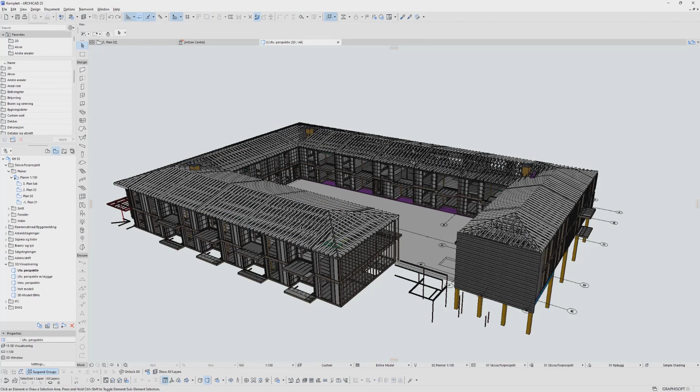But since this was without cladding, we found out that we could test this since we have some automation regarding the saw cuts for every window. Since we delivered this one without the cladding, we found this suitable to test both hot linking and ArchiCAD teamwork. So this is a colleague of mine doing all the walls.

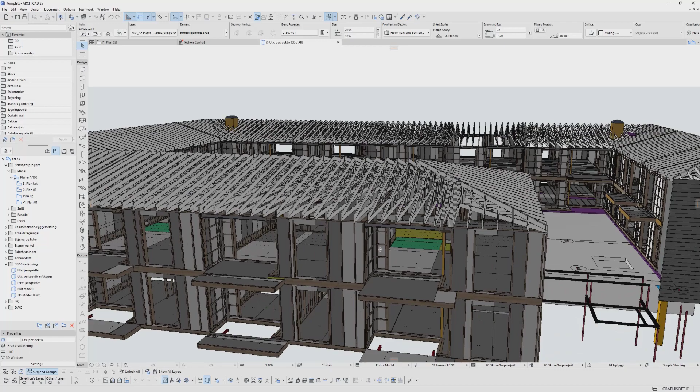Trusses are of course done in Pamir, but I did also most of the flooring elements with ArchiFrame based off the teamwork server.

So Petteri has asked me to show a little bit on how we work at Støren Treindustri, and I will do that. I have found some random plan drawing on the internet and I have done some architectural modeling of this.

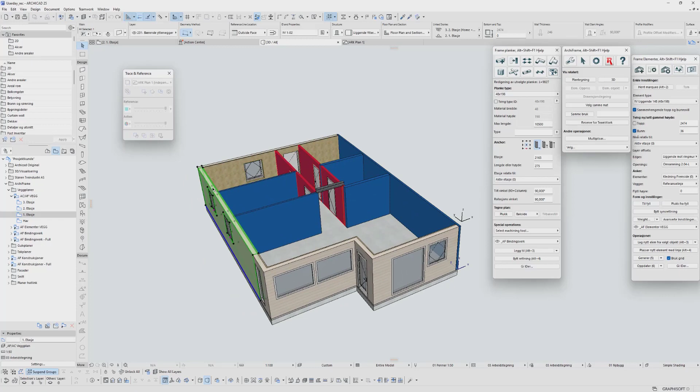We have external walls, we have load-bearing walls, and the red walls are non-load-bearing. These are supposed to be the sound and fireproofing between the apartments.

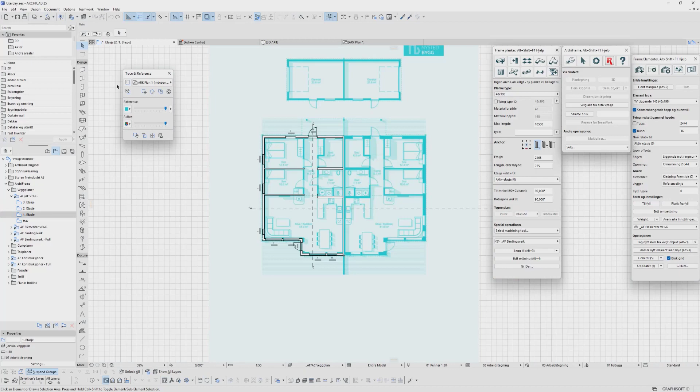So when doing ArchiFrame, I will just turn off this, and we have some preset settings that I've already made, where you can see I have edges, I have openings, I have also lifted it 36 millimeters. I change this to core and reference line, and then I just start adding elements.

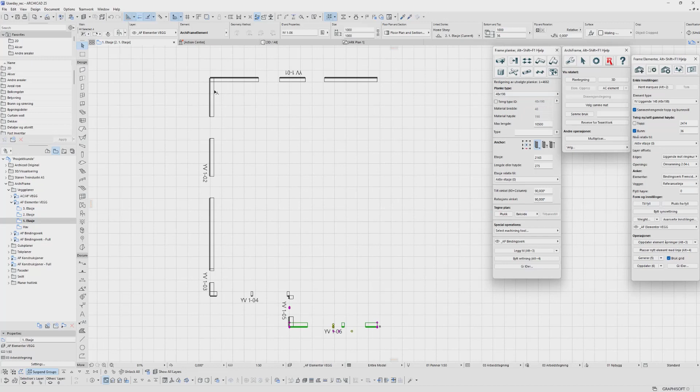When these are done, I can go to these settings, which shows all the elements. Before even making or generating the elements, we can adjust the corners.

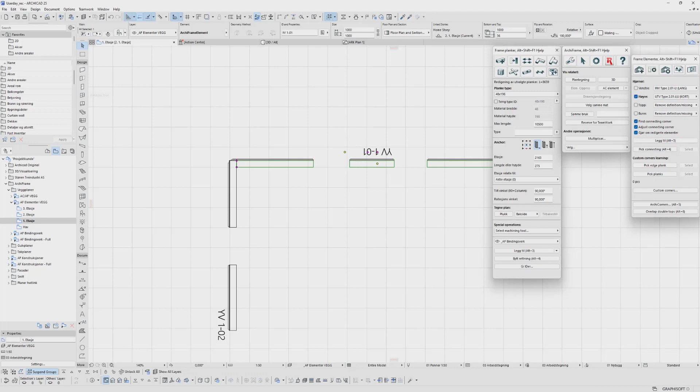This is a nice feature I really like about ArchiFrame, where you can code your own corners. Since I have pre-coded all the corners for us, I will just add this one. As you can see, all the elements are adjusted accordingly.

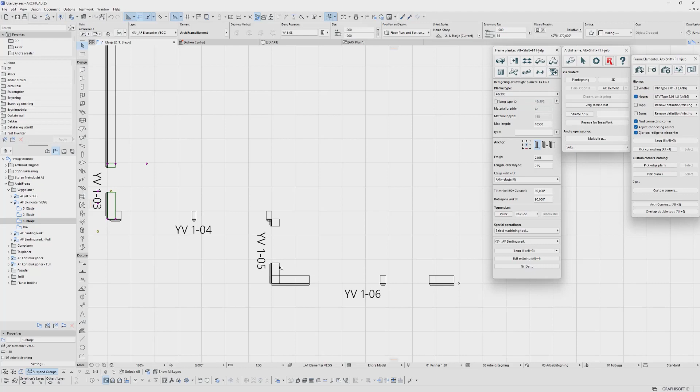Now that every corner is set, we have an internal corner. You can also add this. Or maybe this should be short. Now you can just select everything and generate.

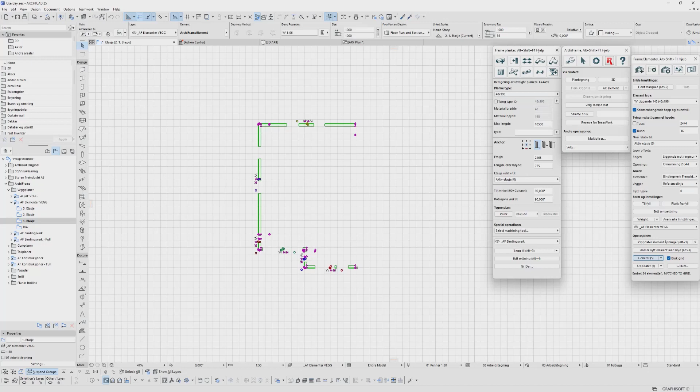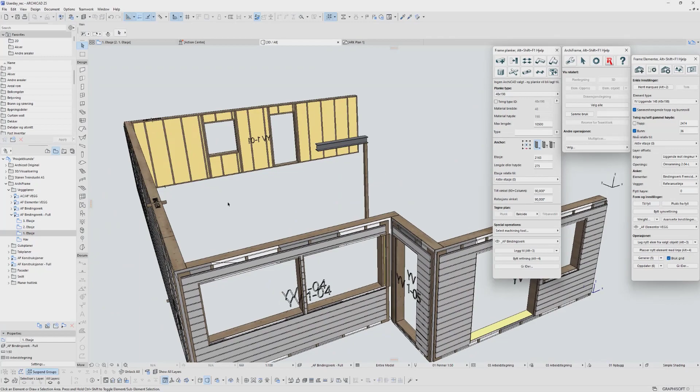And the machine will think a little bit about this. So now we have generated all the elements. I could go and change a little element settings, and now we have our ArchiFrame elements generated with the connecting corners like the one I have presetted.

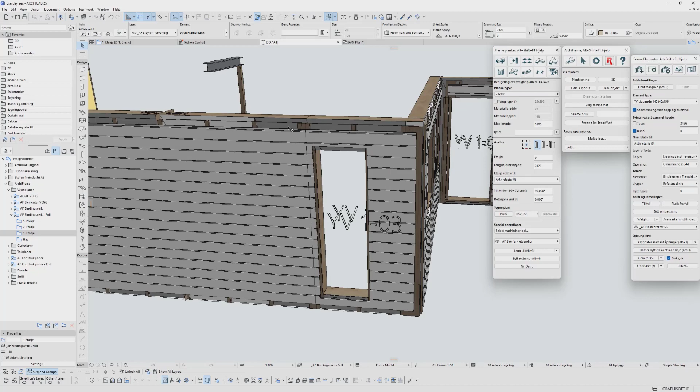One of the nice features with ArchiFrame is when the automation or the preset corners doesn't work. This wall is divided because this is the maximum length that we can produce. You could, of course, just make a standard corner for this, but since the offsets for windows are different, at least only the core and maybe the plate or the airstrip layer should be cut. But with ArchiFrame you can easily just adjust those pieces that doesn't function.

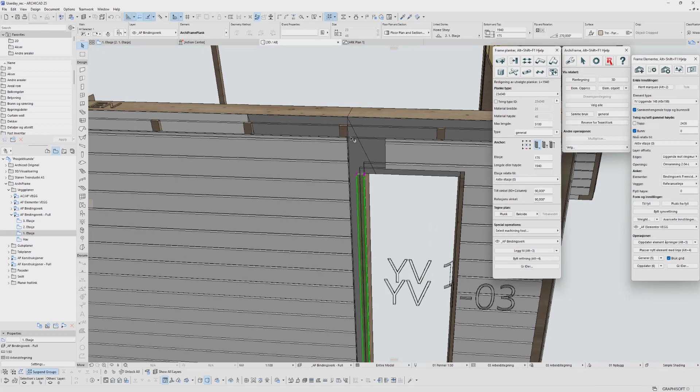Like we could remove all the unwanted pieces. We could adjust this one. I want this one to be a 98.

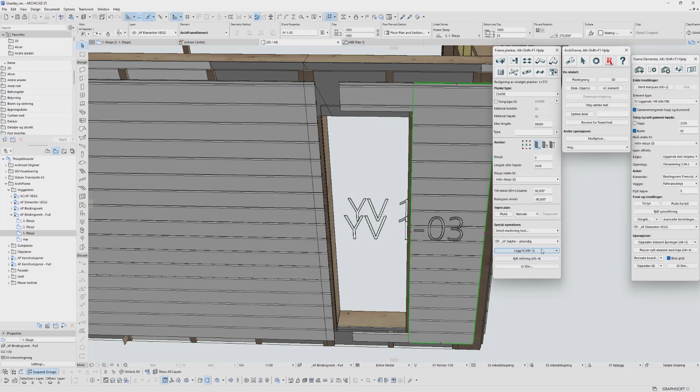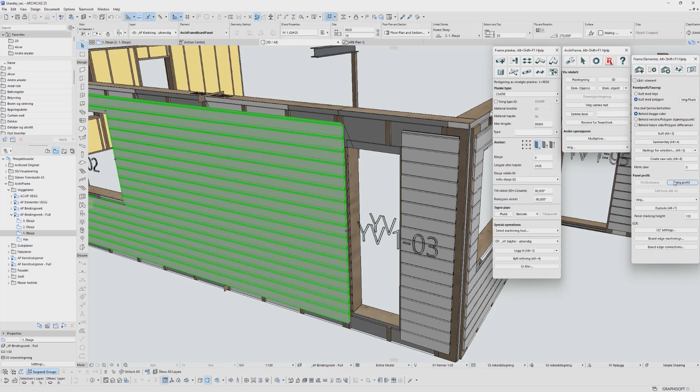This is almost what we produce. Of course, this should be exploded. Probably this piece will go there, and about something like this will probably be our production. So the pieces around this window must be done at the construction site, but then at least we will have all this cladding produced in the factory.

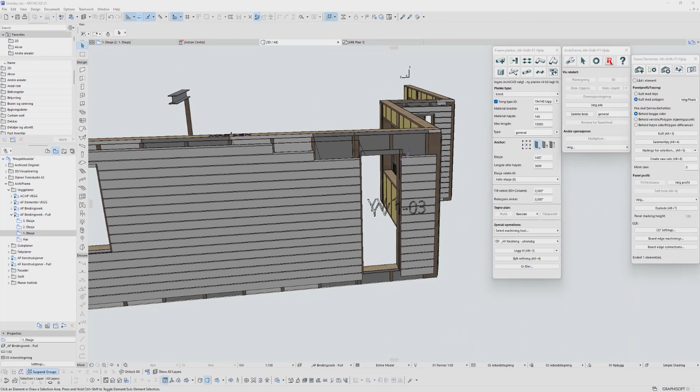Of course, you have load-bearing walls, and sometimes the automation doesn't quite get you what you want. We can add load bearing for this one. For example, these pieces we at Støren at least would like to connect.

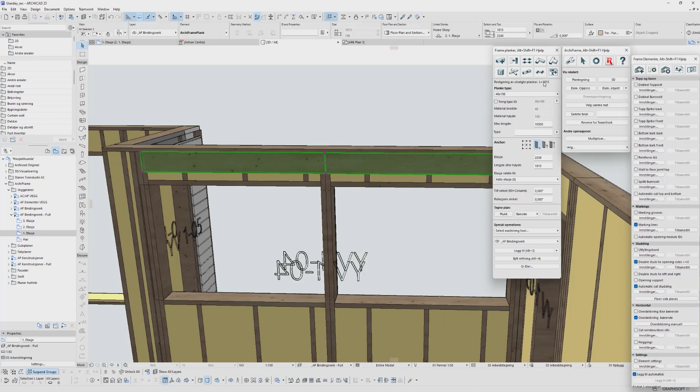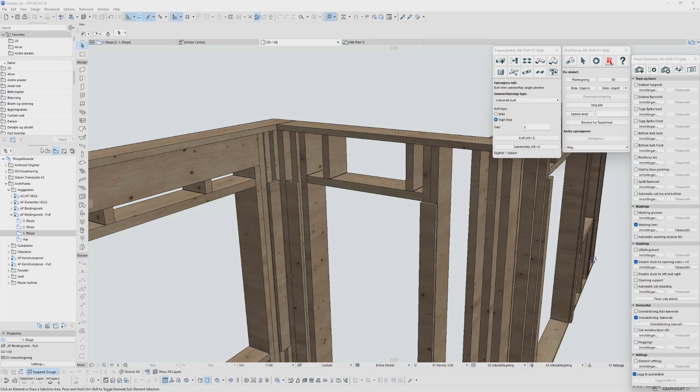There are several ArchiFrame functions that are easily accessed by the menus, or you can even script most of them. So for one instance, one of our tailored settings that Petteri has made for us is the sawcut script.

We have a sawcut script that defines sawcuts based on the openings. We can actually add sawcuts, and we are able to produce this in our Weinmann.

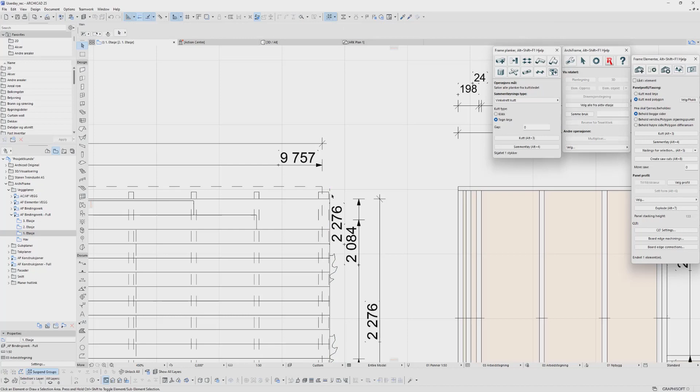Of course, for actually this wall, it would be best if this one is adjusted and those two pieces are manually made in the factory so they can be added on the construction site.

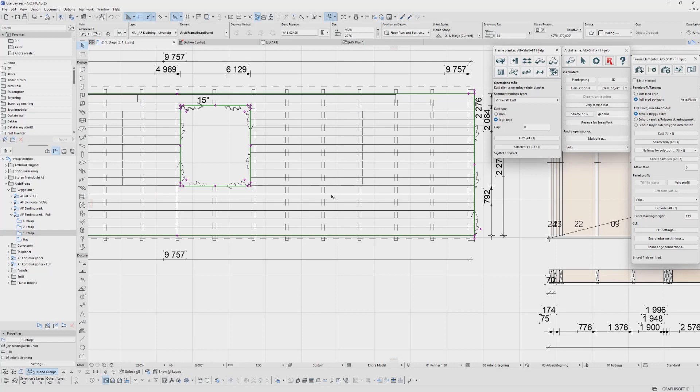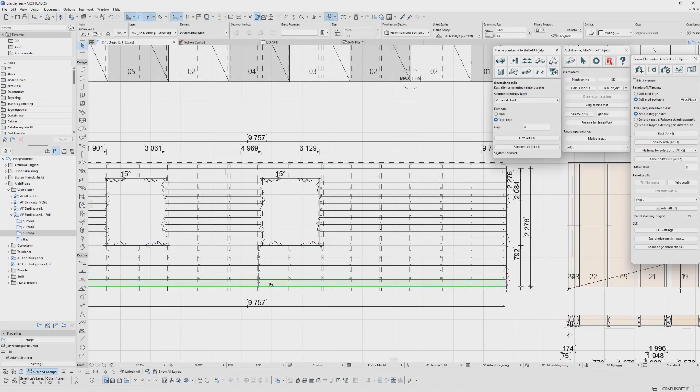Another nice tailoring that we have had Petteri fix for us is the nailing script, with the possibility to add nailing with scripts. This is some tailoring that has been done. We have for horizontal cladding - we don't want our first one to have nails, nor the two top of the windows, since those are manually done, or we need this for our production.

ArchiFrame gives us the possibility to change the side pieces for windows. We use another dimension than the standard ones for the air strips. Overall, everything else stays the same.

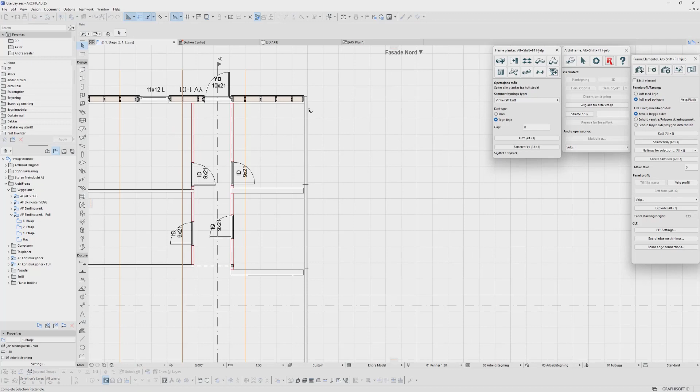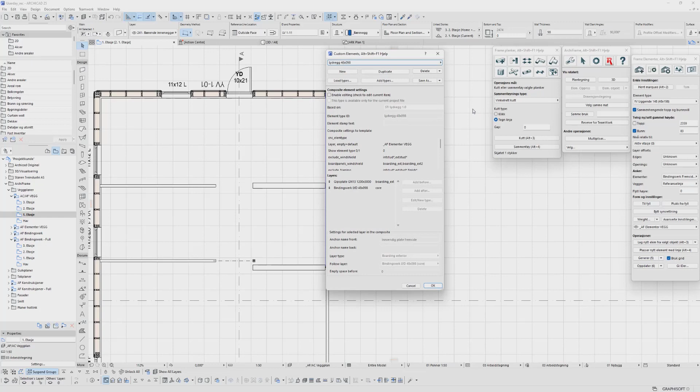Another nice feature of ArchiFrame is that you can take one standard, or at least one working script, and adjust it a little bit. We've done this with the sound walls - you could add a sound or apartment wall for these two.

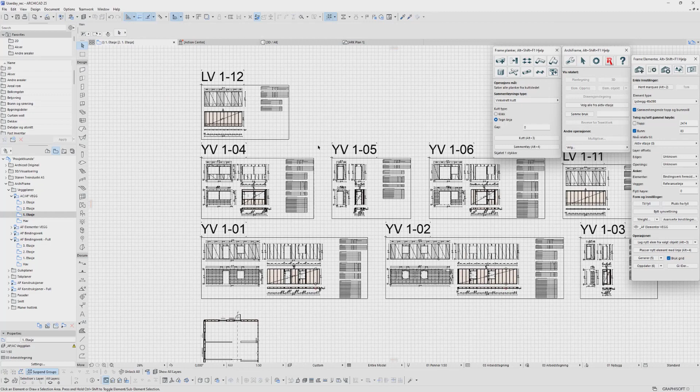We have adjusted the top and bottom balk to suit our needs. We use a 23 by 98 instead of a big balk. So let's show this in 3D.

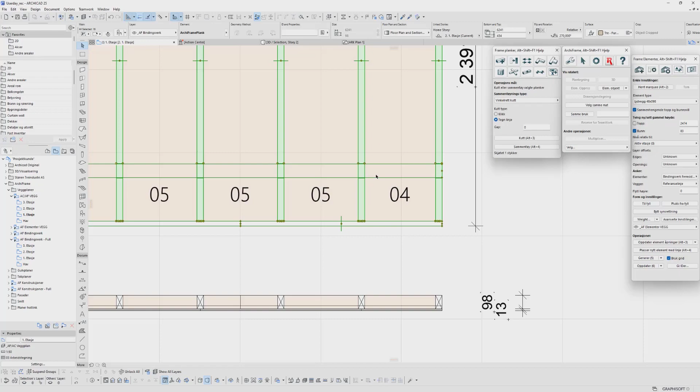When we deliver these types of walls, we need this top and bottom for nailings on the construction site. So, well, I should probably do this and regenerate it.

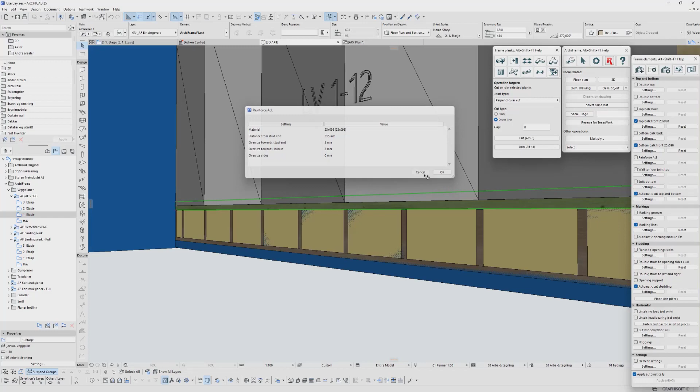Now it's better. As you can see, this script is made of... I could actually just change this to English, probably most people would understand. It's bottom balk. By changing these settings, we could use it for another purpose than it's mainly supposed to do. We'll also add the edges settings for this one and recreate the boarding.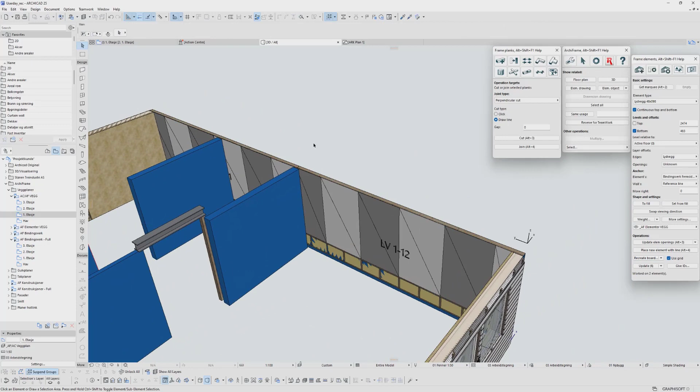Another nice feature of ArchiFrame is that you can now select multiple walls. It's mainly important for walls like this. So if we just hide all the other layers, you can now select everything.

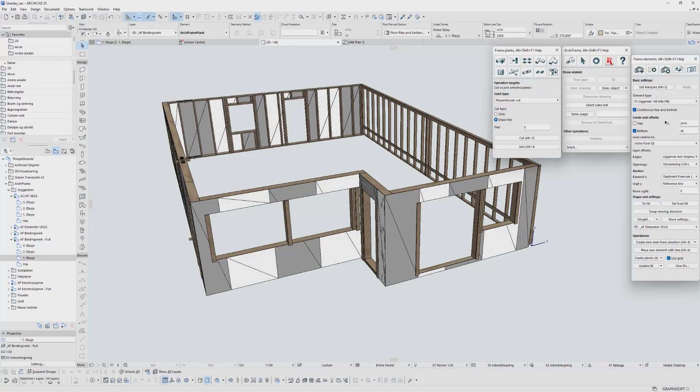You can add nailings, and the nailing will only be done to connecting elements. So this plate won't nail the beam in this wall. This is a really good feature, so you can add nailing to the whole project in one go.

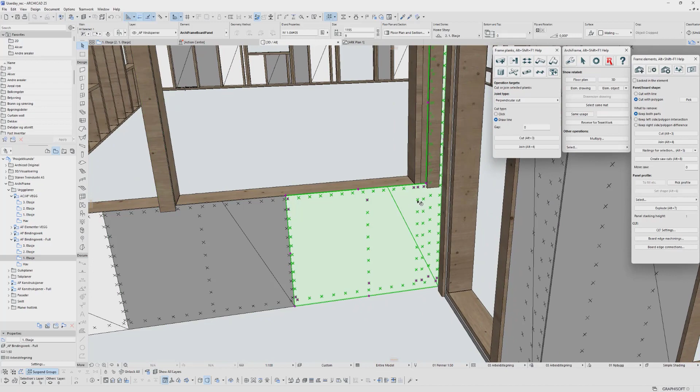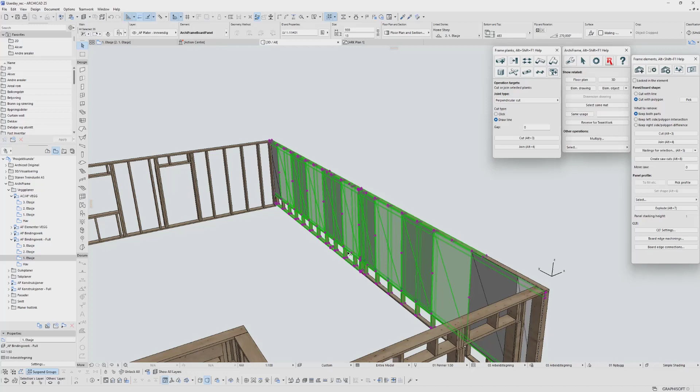Also, if the nailings are too much, you can easily just go through the model, every wall, and decide that you want to remove some of the nailings. And of course, you will need to add nailing to different types of board, or if you have different types of nailings like we do.

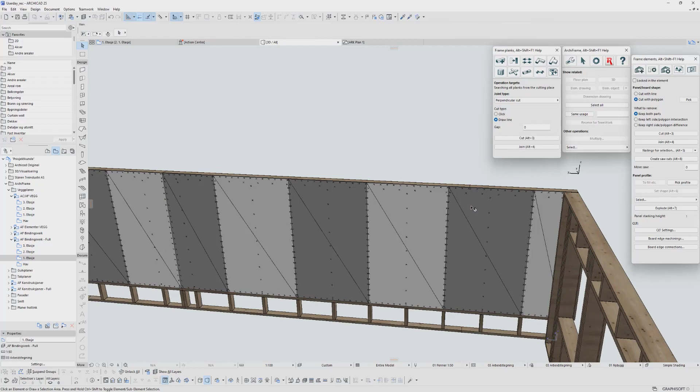So we should also be doing some interior walls.

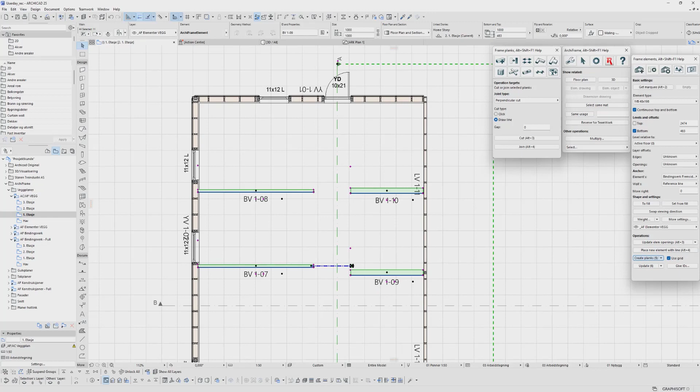With ArchiFrame, you can easily double up studs. You can work in 3D. Here we have some troubles.

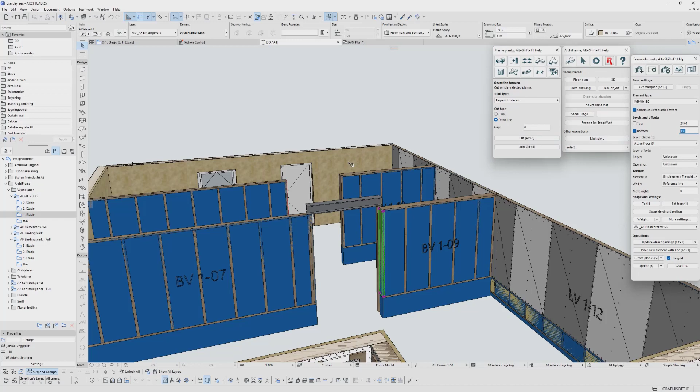This has gotten the offsets from the plates. It's an easy fix - you can of course just remove the offset and recreate the element. If you go to the element object, you can adjust it down. You can set this to 0.

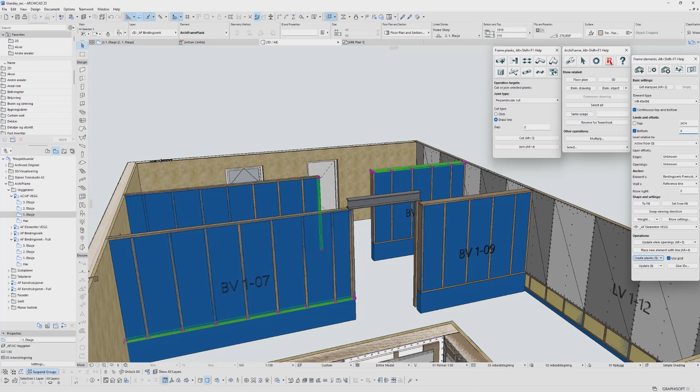If you do this on all these elements, then recreate it, they will be fixed. So also in 3D, it's easy to just double or triple a stud if needed.

And of course, we hide all the layers. We can now go and explode all the cladding pieces. This done - could also be adding, sorry for the Norwegian here.

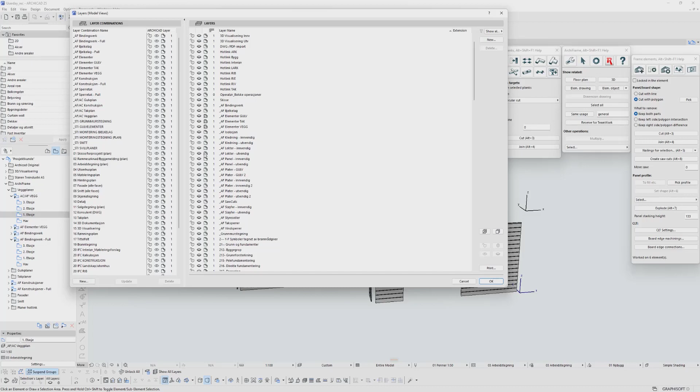It's easier. Then we can add nailings. Here it's also possible to add nailings to several elements at the same time - you don't need to do this one by one.

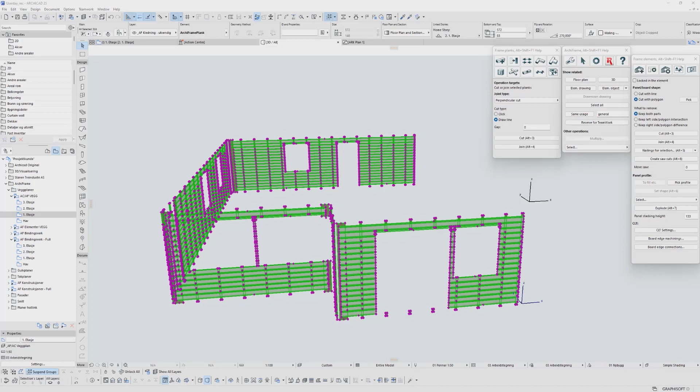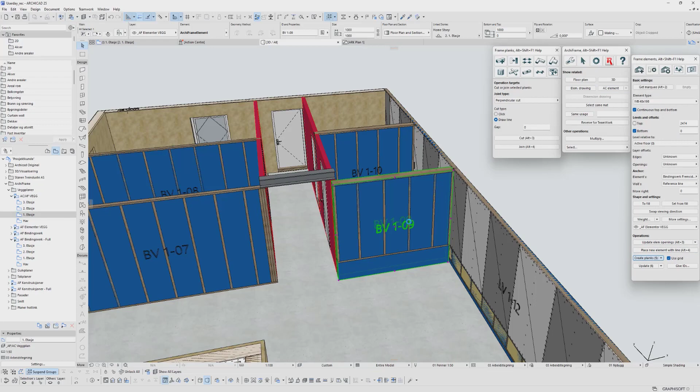Now all the cladding nailings are done. We can go and - this one wasn't correct. Recreate this one.

So if I just show you all the construction now, we have insulation, we have cladded, we have nailings for boarding, we have this one adjusted. Of course, there will be some manual adjustment needed, but if you say this is finished, we can go ahead.

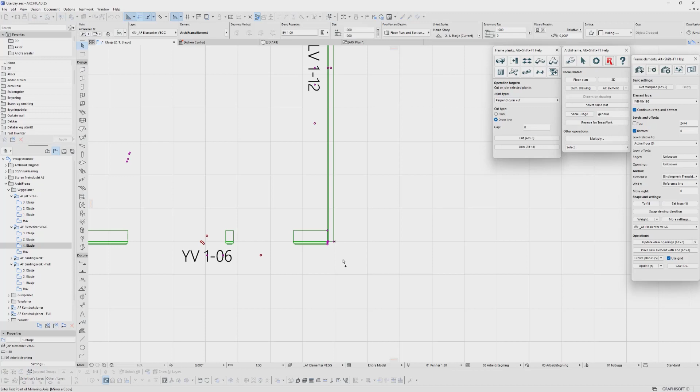And duplicate this one. So by just selecting all the elements, it's possible to use standard ArchiCAD mirror and copy.

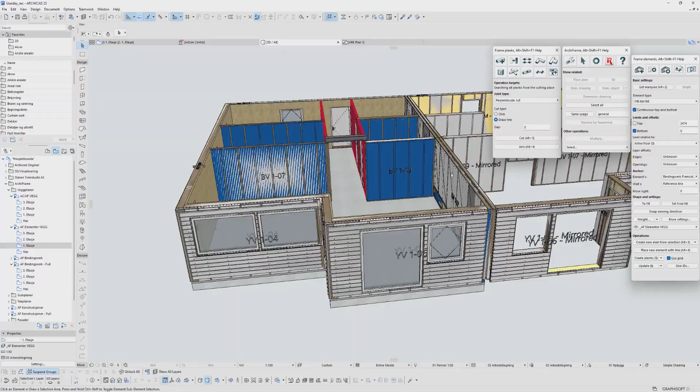So after mirroring and copying, you will then have a mirrored copy of the same, even with nailings and everything. So if you are mass producing, this is a very nice feature that could be used.

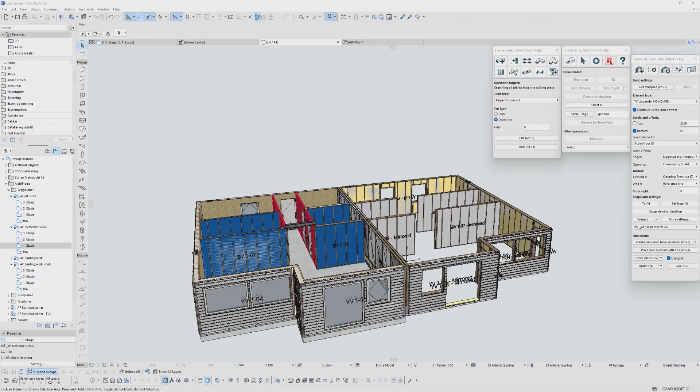So regarding the SawCut script and the 2D, of course this one doesn't have an elemental drawing yet, since it's only the 3D pieces. So you have to update it, and then it will get an elemental drawing. And it won't be linked, so if you mirror a copy, you can also mirror a copy of the walls

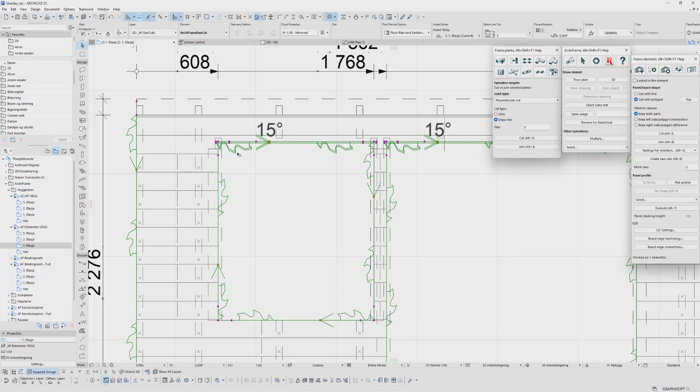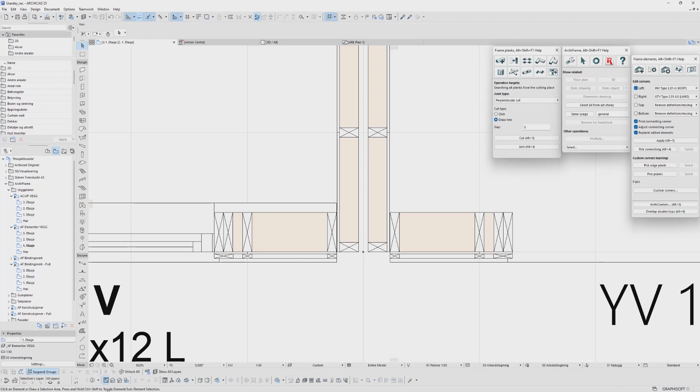So for corners that are close by, it's a nice trick to remember that you can use pick connecting to ensure that you have the right connecting corner when you are applying one. So our corners for this type are made up of the external and one internal.

When walls are so close together, sometimes the software finds the wrong one and the wall gets all crazy. But by picking the connecting one, you will be able to force ArchiFrame to use this one.

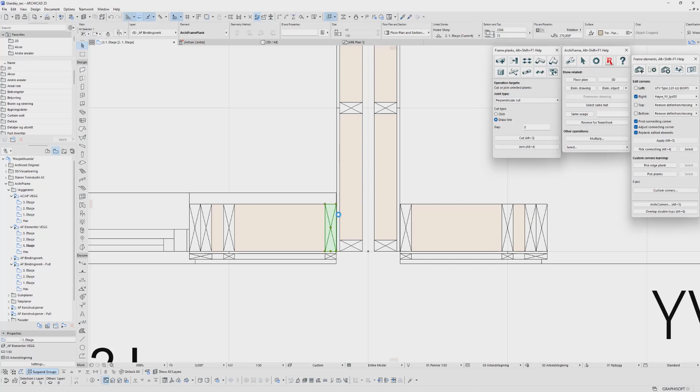If you follow the tutorial on YouTube, you can make the two external walls connect to each other, then have the internal walls connect to each side, and maybe do all these four in one go. I haven't tested that yet, but I have a theory. At least you can pick the right connecting one if you know which one it is and apply this.

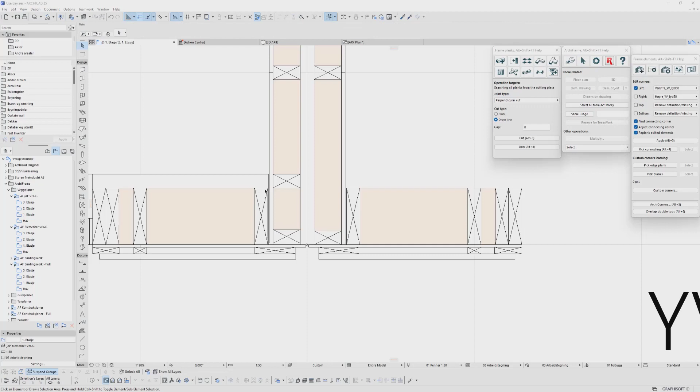See, this one doesn't have the right 48 by 98 stud, but it has the correct air strips. By using corners, you can also add different types of planks instead of just dragging the element. You'll be able to have different sizes or even add several pieces. So yeah, this is our way to model ArchiFrame walls.

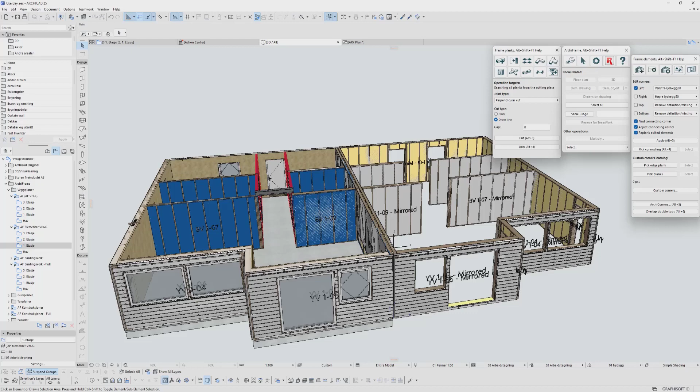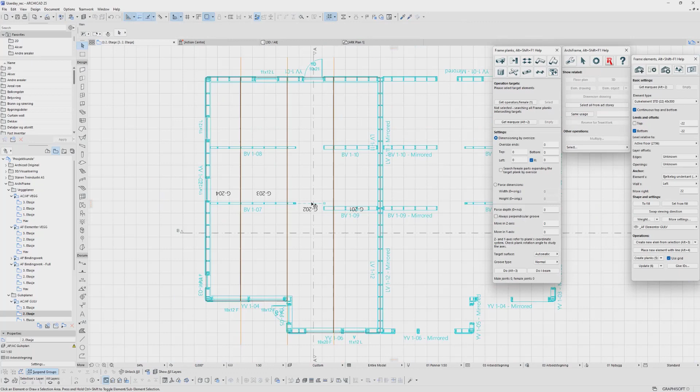So let's make some floors. I believe we have to have this on, and I'll be creating those in the negative Y direction. We can create all of them first, just to see everything before we have to make adjustments.

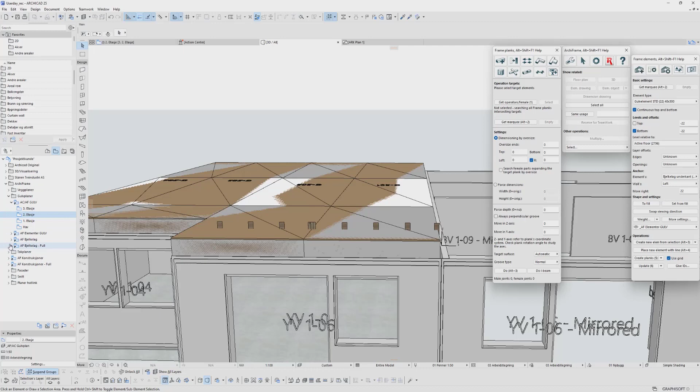Probably go off the wall and do some of these, which are of course more than our maximum length for this type, and it would not be possible to produce, but for this it's okay. It's probably possible to script or adjust with some Lua settings, but for now we will just delete the unwanted pieces.

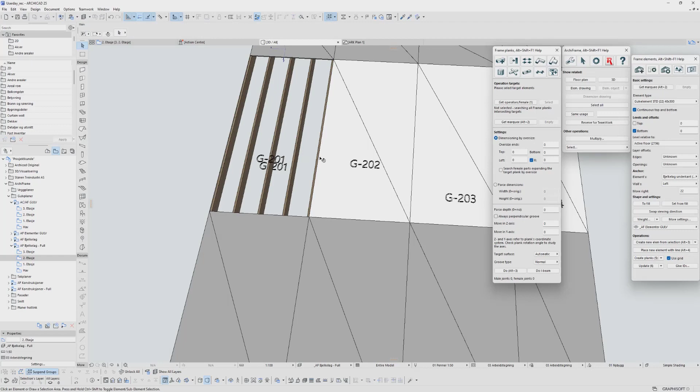If you can see the numbering, it starts with 1, and we have it so this piece has a full length, but this element won't have a beam, since the plate on the construction site is in the same place.

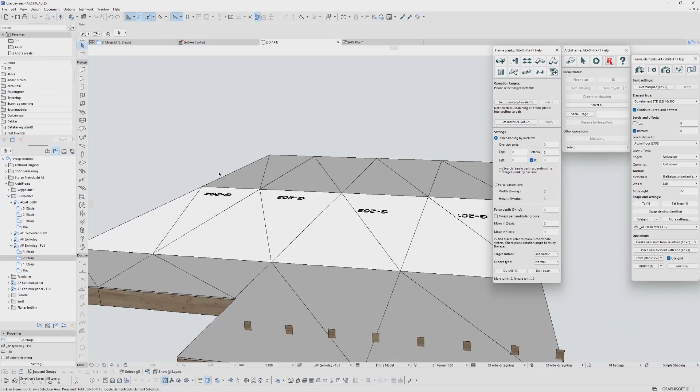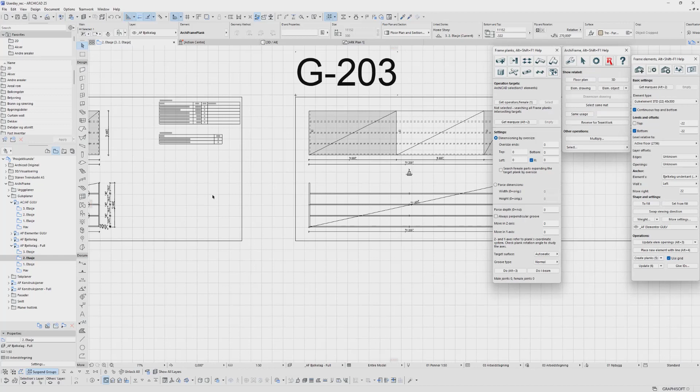I also did this upside down, because if we export it to the WUP file, we would want this one, since this is the 0,0 on XY in the WUP. So we have to think about that also when we produce the PDF file or print this one — it's the same way as the WUP file.

So we constantly do this. If we start production from this side and go the negative X value, we have to set this as the bottom and this as the top. This is just our convention, at least for us.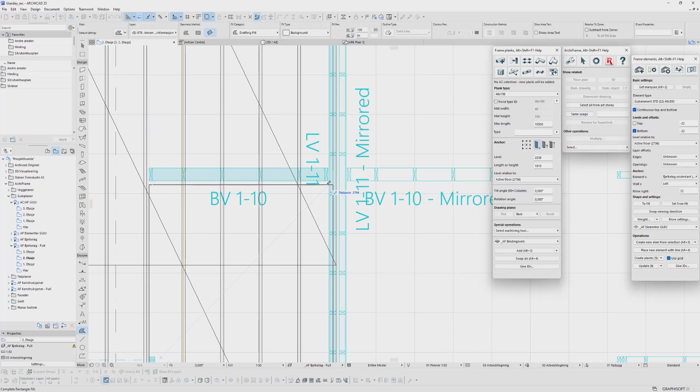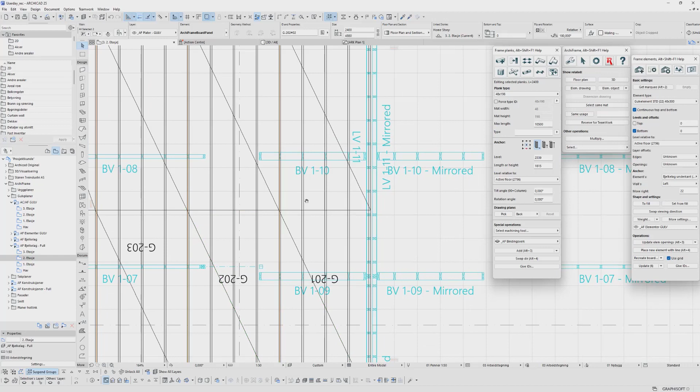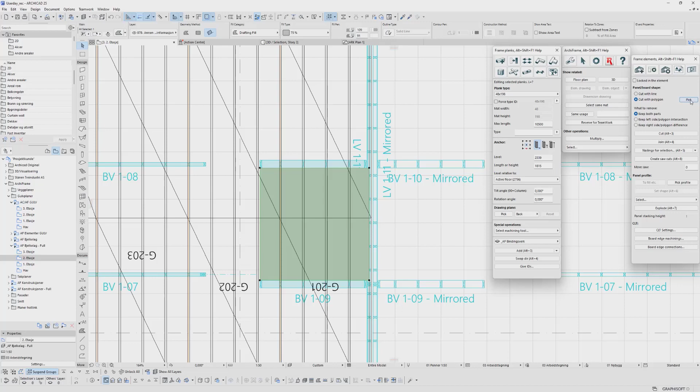Add this, and this piece also. So what we do for cutting: pick the polygon, cut.

Even if these are different elements, we can move this down, let's say 23. I like to change this to some glass, not blue maybe, but clear, so we can see through it.

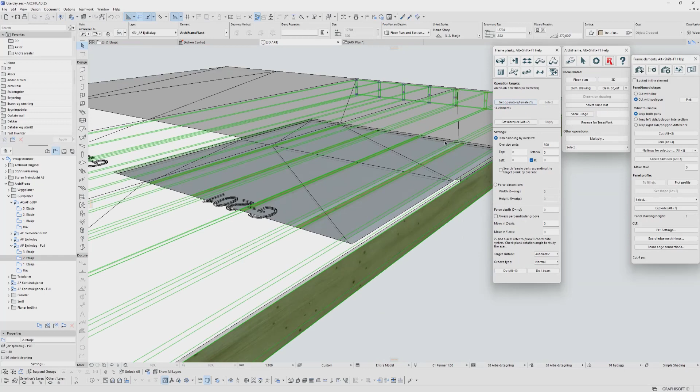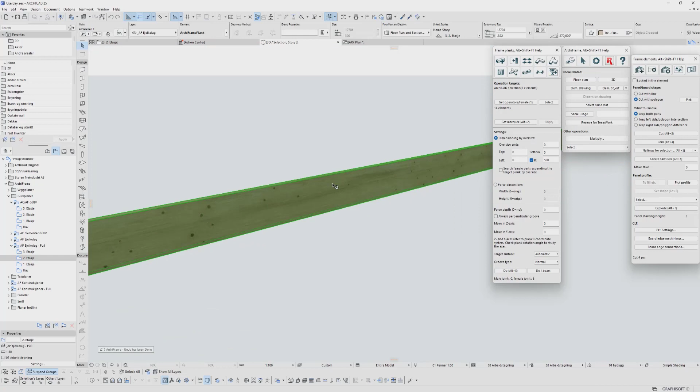If we now do this as operators, we'll actually make a groove, probably 0. Right. Now we have a groove for the bathroom.

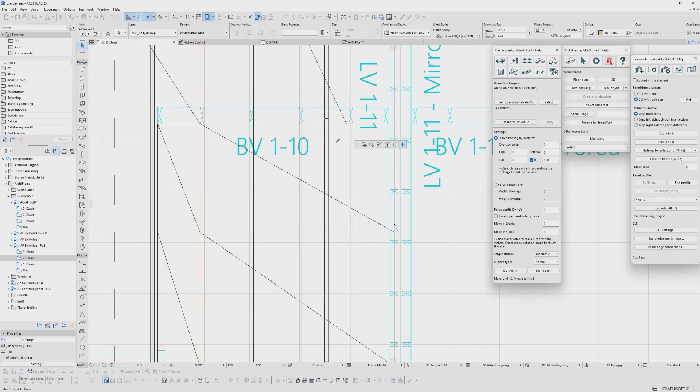Of course, you would probably need to add some extra pieces of framing because of the concrete. These are also exceptional settings with ArchiFrame.

You can also do this in 3D. Have the architectural model, and you have a grooved bathroom floor, at least.

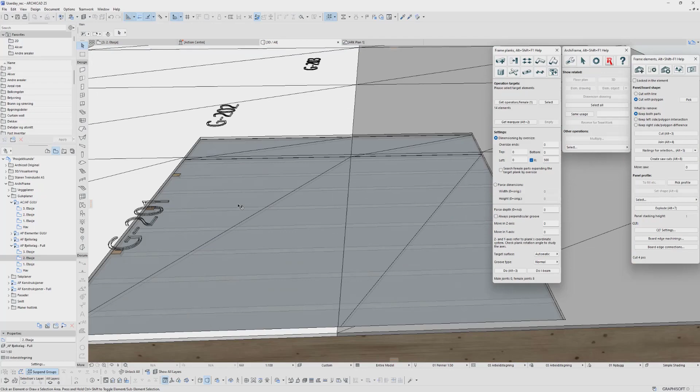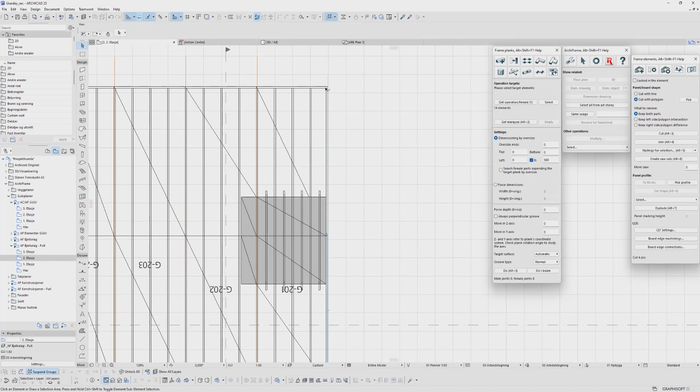Okay, so what I can see is that my time is running out. So let's just add some of the nice new features of ArchiFrame, which is to add drillings to the actual floor elements.

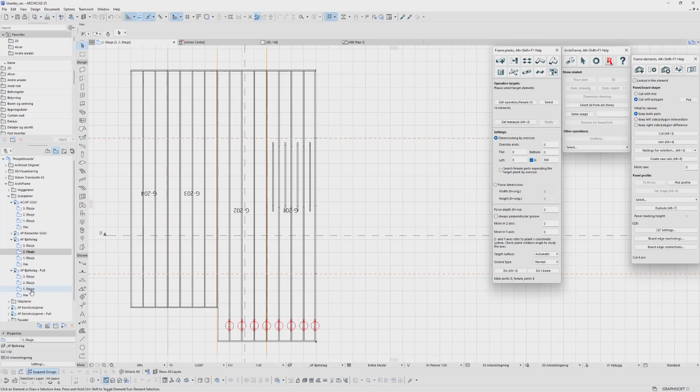If I just divide this in 4, I would want one there and one there, and this one. Okay, I need to select this board, and I want maybe in this and this stud.

Then you have a nice new feature with element drilling holes. You can change the drill diameter and the position from the studs. This is for us — you can add this again. Add those there. You could select multiple boards and joists or beams, of course. And you will have one in the center of the beam and one on each side.

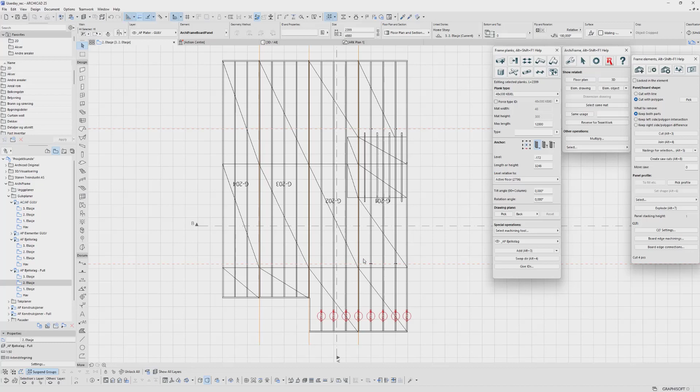So if you add all the layers, selecting these in the floor plan, showing all layers — let's say this one and this one and this one and this one — you'll be able to add elemental drilling holes on each line, and it handles different elements perfectly.

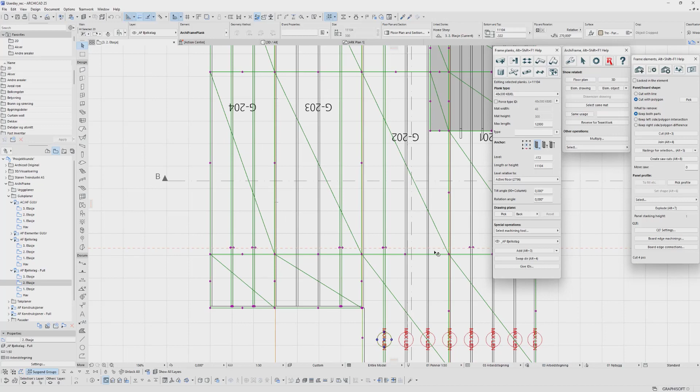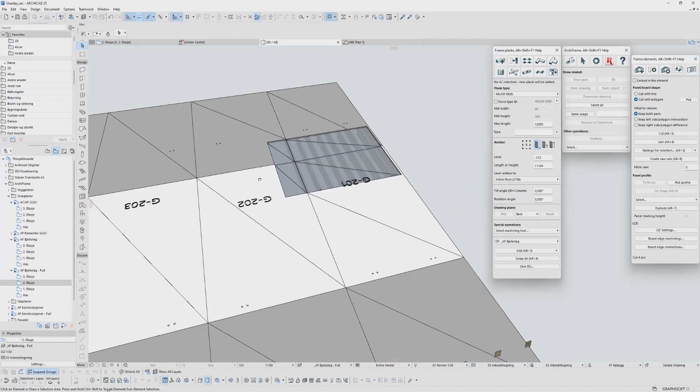Adding one on this line — this script could possibly be fixed to have a repeater, but this is quite nice when you need lifting drill holes. And if there are several beams, you just need to select them and it will make holes in both.